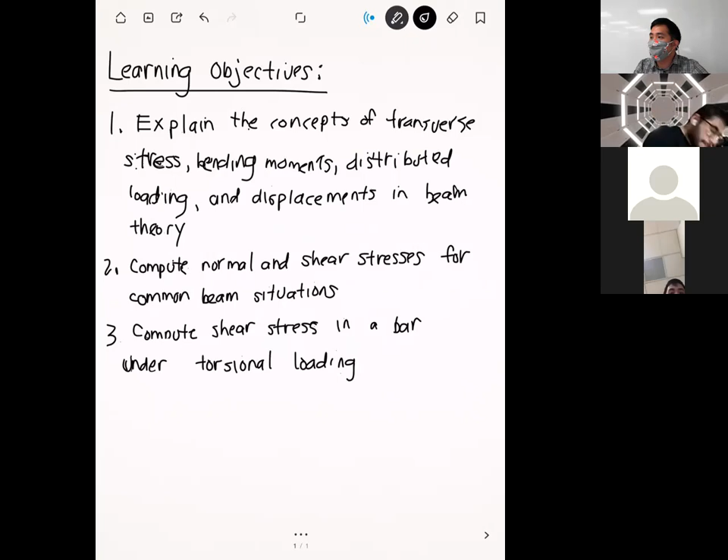Even at night, no wind? Yeah, not much wind at night. The past couple times I've been to Joshua Tree, I could be confusing it with Calico Ghost Town, but there was always some kind of wind. Not much this time, just a little bit of a breeze.

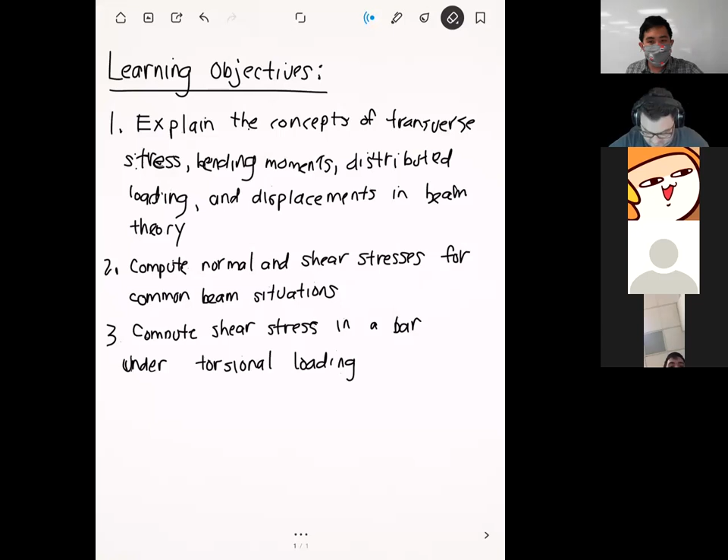How was your long weekend? Busy, busy doing homework and working on senior design stuff.

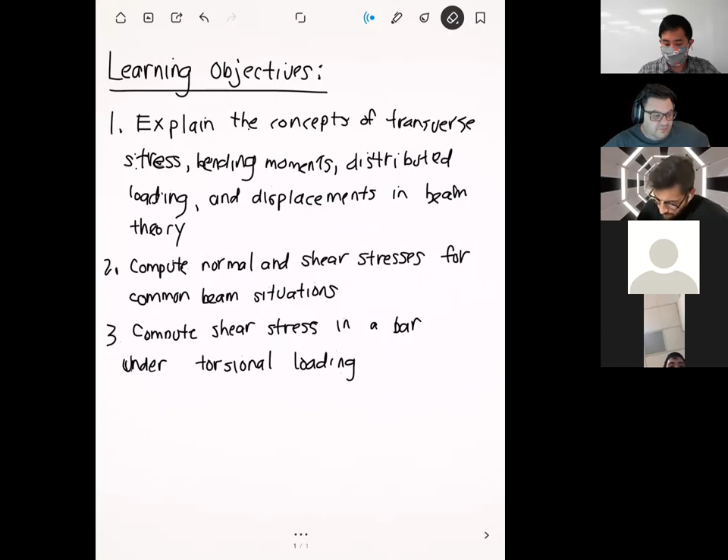Those are SolidWorks files, and we're going to use that on Thursday. The crank assembly is the one we'll use mostly in class, and the other CAD file is for an additional activity for the homework. But we'll do that on Thursday. Today we're doing one more lecture, since I like to keep the activities toward the last thing of the week.

Works for me. I just wanted to make sure if I needed to have Workbench open, I had ANSYS open.

Not today, we're going to do it on Thursday. All good.

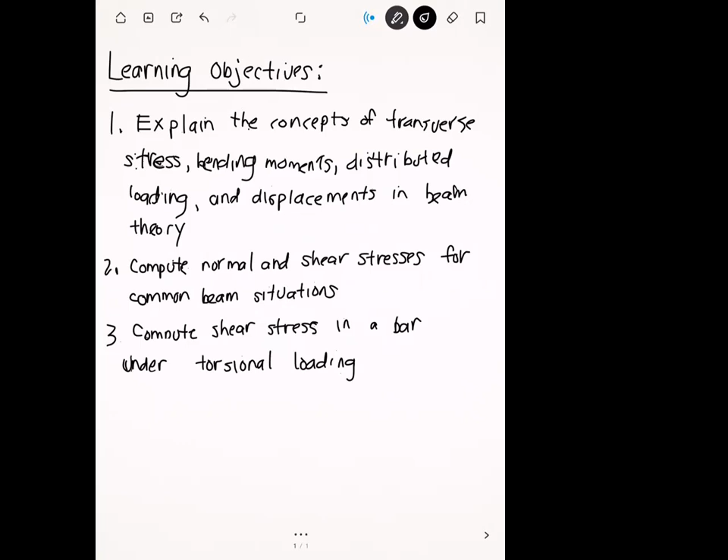Are there any questions on anything before we get started today? All right, let's go ahead and jump right in. The topic for today's lecture is going to be a review of beam theory.

I say review, but I don't think I ever really formally learned beam theory myself when I was in college, but my statics and strength of materials professors were a little bit sus, so maybe I was supposed to learn it and we just never got to it. I also never learned about drag and lift in my fluids class either, but I know for sure my fluids teacher was kind of on the way out.

My old fluids teacher back in college would take the first five minutes of lecture just to walk down the stairs to get to the front of the class, which was annoying at first. But later I found out he was actually in an airplane accident and survived it, and his leg had been permanently crippled since then, so I cut him a little bit of slack for that.

Okay, so beam theory, right? Beam theory in general is really useful to learn, not really for all the equations, because there's a lot of equations that come into it, but I like to think of it as a way to build intuition and a conceptual feel for how beam-like structures will respond to stress.

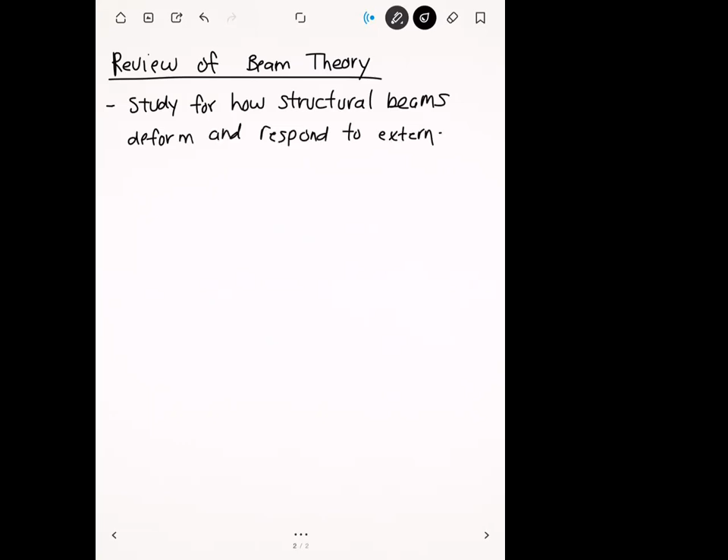Beam theory is the study of how structural beams deform and respond to external loading. Very much within the themes of this class, where in general we're interested in seeing how structures deform and respond to loading, but beam theory is specific to beams.

Let me draw you out what my version of a beam looks like. Very simply, a beam can just be any kind of long, slender structure. Here I have a cantilever beam, so on one end it's completely fixed, and the other end is free. Let me go ahead and draw the coordinate axis here. So we have our x-axis, which points down the length of the beam. And the y-axis points downward.

Some terminology here: the x direction, we call this the axial direction. That just refers to going down the length of the beam. And the y direction, this is the transverse direction, meaning that it's perpendicular to the long axis of the beam.

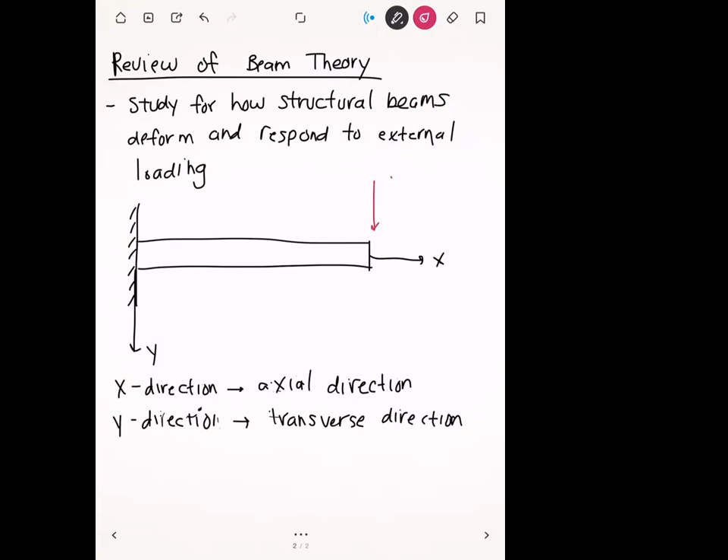All right, so on this beam, we can expose it to some external loads. And so we might have, let's say, a point load P. So we'll study a case like that.

Or another way we can load the beam is with a distributed loading. So we can have a load that distributes kind of evenly across the beam, maybe something like this. That might be some kind of pressure load or a line load that we put on top. And then in response to this loading, the beam's going to deform.

Let's say the beam deformed exaggeratedly, kind of like that. So it kind of dips down. And what beam theory will allow us to do, right?

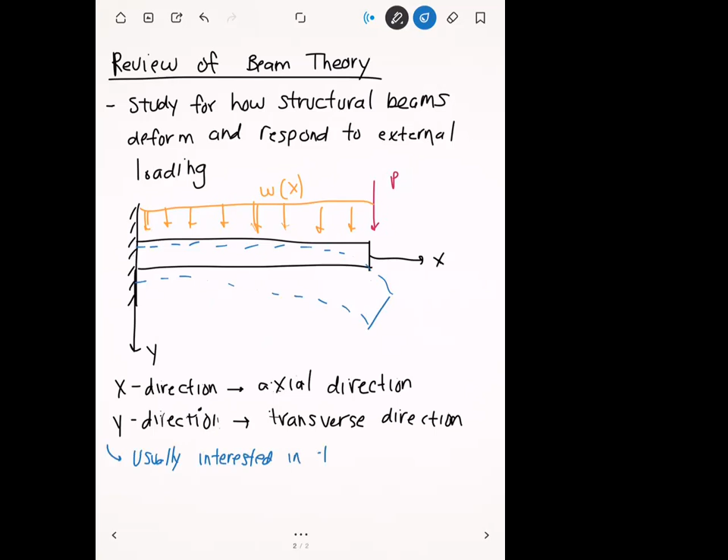Beam theory is basically a collection of differential equations that governs the displacement and the stresses in the beam. We can solve those equations for the transverse displacement, or the bending stresses in the beam.

So those are the quantities that we're going to be mostly interested in when working with beam theory. Any questions on this so far? All right.

So if we cut open the beam, let me draw two cross sections here. If we cut open a beam that's under loading, we'll primarily see two main loads that the beam is going to be supporting. No matter how you're loading it on the outside, each cross section of the beam usually is going to have some kind of transverse shear.

And the way that we denote transverse shear is we give it this direction here. Remember, shear stresses are parallel to the face on which they act.

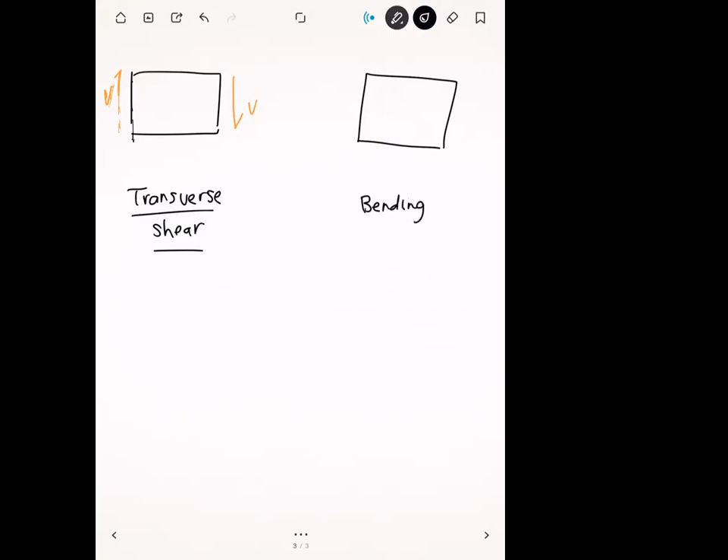And then the other quantity that's present in a beam usually is some kind of bending moment. A bending moment is given by a moment M, which we'll denote just like that.

And these forces, or these reactions that I'm describing here, are internal forces or internal stresses that occur within the beam. Remember, we talked about last Thursday that structures always, in order to maintain static equilibrium at every point within its structure, have to develop these internal forces or internal moments in order to balance those stresses.

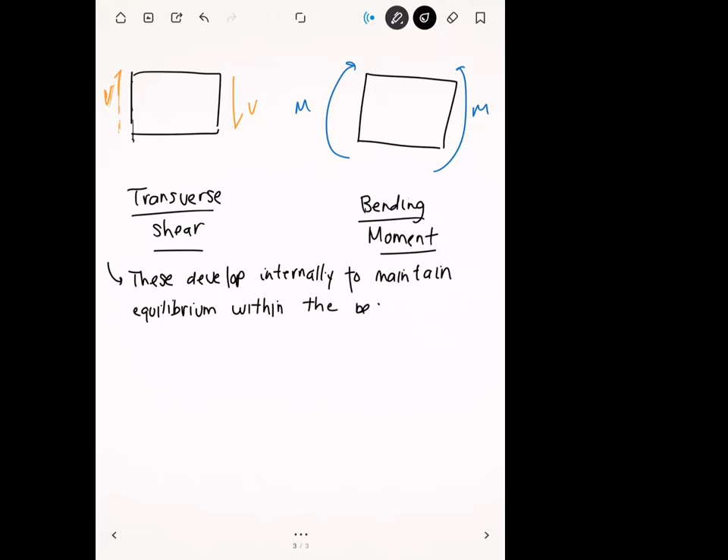All right, so let's go ahead and write out the equations for the beam. We're not going to be solving these equations here, but these are just to show you what equations govern these beams. These are basically a simplification of the general elasticity equations that we normally use for structures, but they've been specialized specifically for beams. Believe it or not, when you see these, these are actually a lot simpler than the more general equations.

All right, so there's a lot of variables here, so first let me define what they are. A lot of these are going to be functions of x, so they vary along the axial direction of the beam.

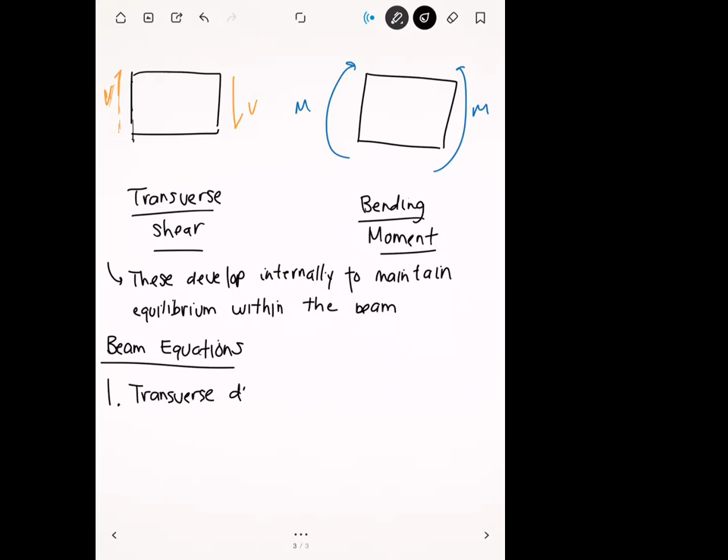First, let's define the transverse displacement. The transverse displacement is nothing more than the transverse deflection of the beam - how much the beam is going to deform in the y direction. We give that the symbol y of x.

Next, we have the transverse shear - actually, we've defined it up there. The transverse shear is just the internal shear stresses that develop within the beam. This is also going to be a function of x, so it can change along the length of the beam depending on what the loading situation looks like.

Next, we have the bending moment, which is also a function of x, so we have m of x. And then the last variable that we'll have that can vary with x is some kind of distributed loading.

We'll give this the symbol q of x. A distributed loading is some kind of external load that's distributed along the top of the beam. This doesn't account for point loads, which we usually handle through a boundary condition. But if you have a distributed loading present throughout the entire beam, we have to work that into the equations just like this.

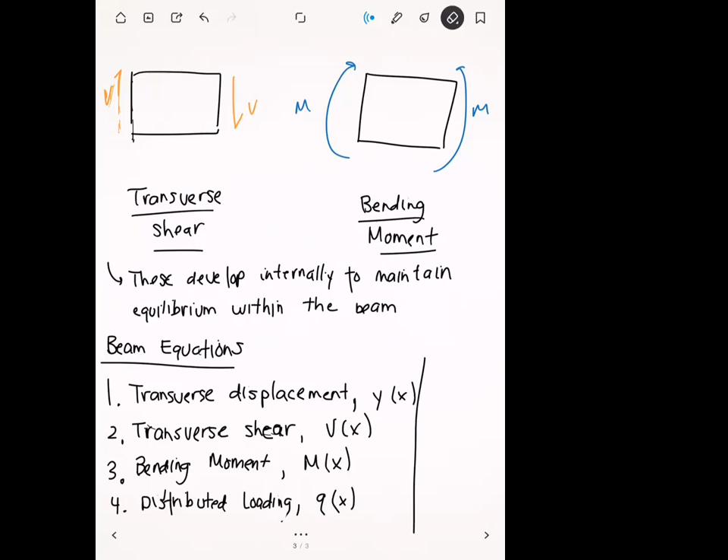There are a couple other quantities of interest that we'll see. I wanted to fit it on this page, but it's a little tight here. So another parameter we have to keep in mind for beams is the Young's modulus.

You'll see these show up in the equations, and this will have the symbol E, just like we normally give it. We talked about the Young's modulus before, so I won't go into that again.

The last parameter we'll look at is the moment of inertia, which is given the symbol I. The moment of inertia is a property that depends on the shape of the cross section.

Depending on what type of cross-sectional shape your beam has, whether it's an I-beam, a cylindrical beam, or a square beam, all of those have different moments of inertia, and that's going to affect the displacement of the beam, and really all the quantities, purely from a geometric factor.

Different shapes distribute the mass of the beam in different ways, and that has an impact on the results. All of those different shape effects are basically summed up in the moment of inertia.

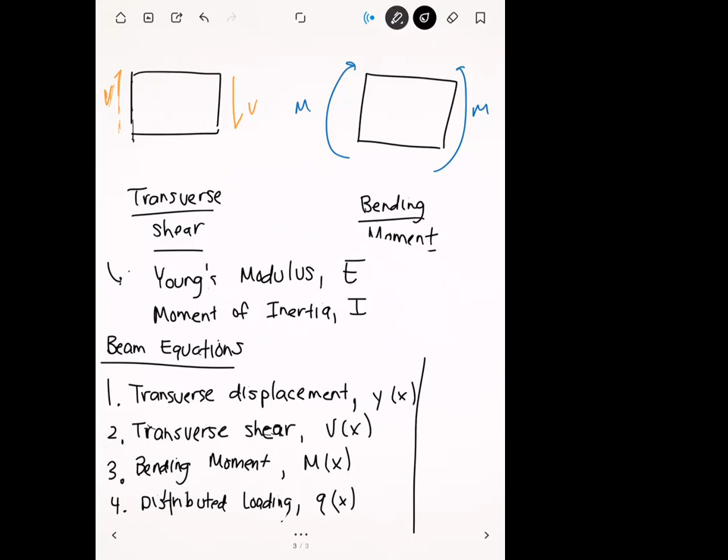Any questions on this before we jump into the equations? All right, so let's list out the equations—there's quite a lot here, and they're kind of grouped into different categories. First, let's go over the bending moment shear load equations.

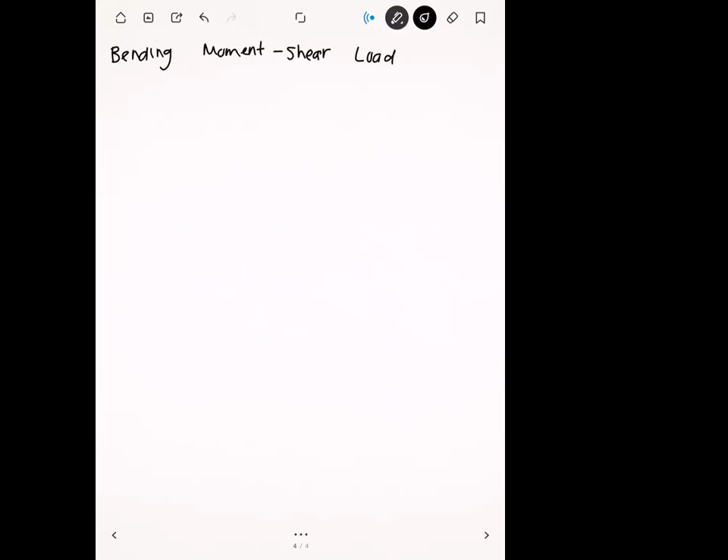The bending moment shear load equations look like this: we take the derivative of the bending moment as a function of x, and this is going to be equal to the transverse shear stress as a function of x.

Then we have the second derivative of the bending moment as a function of x. This can be equal to minus q of x—it's going to be minus the distributed load.

So for a case where you have a distributed loading, this is a way that you can solve for the bending moment and also for the transverse shear.

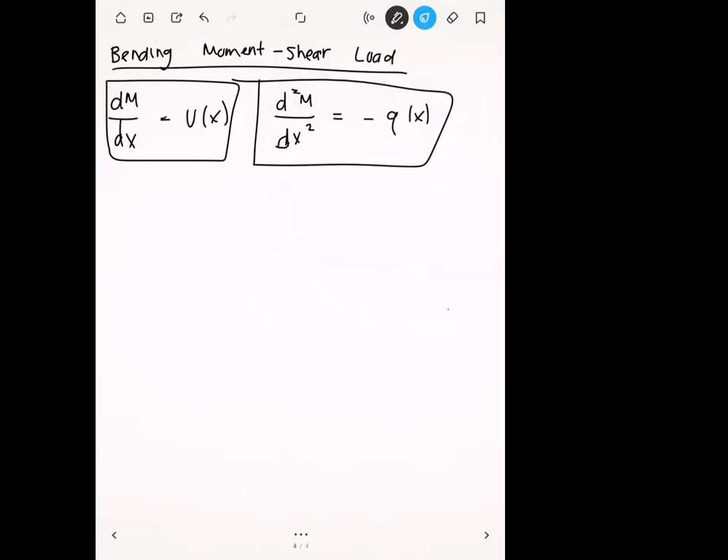Usually the way these equations are used is that you are given q of x—the external load—and that's not too different from our finite element cases.

Then you use the equations to solve for the internal reactions: the internal bending moments and the internal transverse shear.

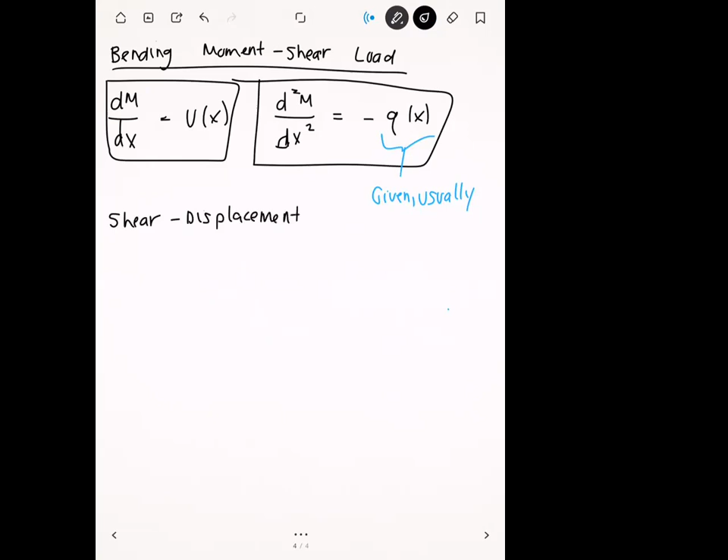Once you have the transverse shear, you can relate that to the transverse displacement of the beam.

Basically, what you're going to do is take these equations here. Once you solve for v of x, you plug it in down here, and you can use this to solve for y.

The equation for that is v of x equals minus EI times the triple derivative of y with respect to x cubed. This will give you y once you solve these differential equations.

So that kind of forms one closed system right there. But what if you wanted to relate the bending moment and the displacement?

These equations are called the bending moment displacement equations—or there's only one equation, actually.

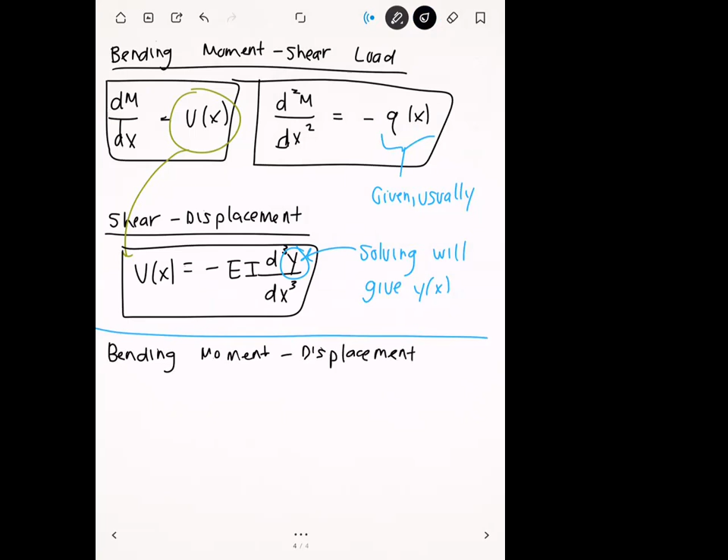To relate the bending moment and the displacement, we have a second derivative here: M is equal to minus EI times the second derivative of y with respect to x.

So if you wanted a relationship between M and y, that's your equation.

Right, and then finally, if you wanted to relate the distributed loading with the transverse displacement, you can do so with these equations. We can have q of x is equal to EI times the fourth derivative of the displacement.

So for the case where you're given the distributed loading q of x and you're only interested in the displacement, you can solve this differential equation here. Although it's a fourth order one, so you're going to need a lot of boundary conditions for that.

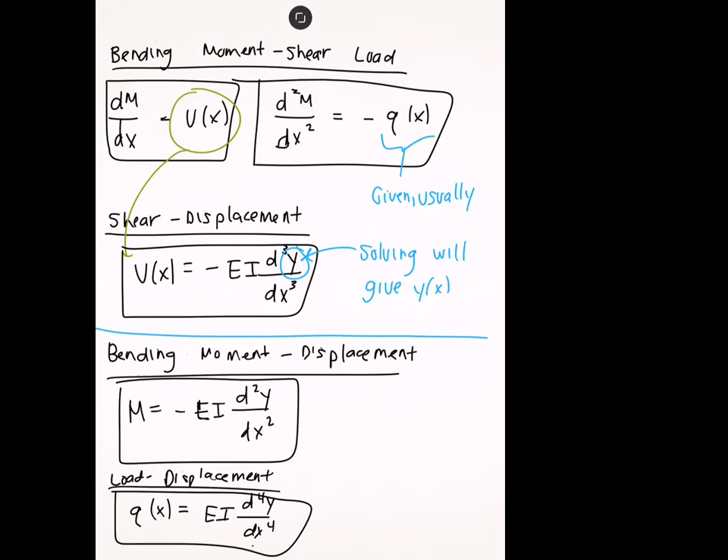Okay, so any questions on this so far? Is that dM over dx equals v of x or minus v of x? It's just a positive v of x. And that's an equal sign? Yes.

All right, and so those are all the equations there. Let's talk about a way to compute the bending moment, or the bending stress.

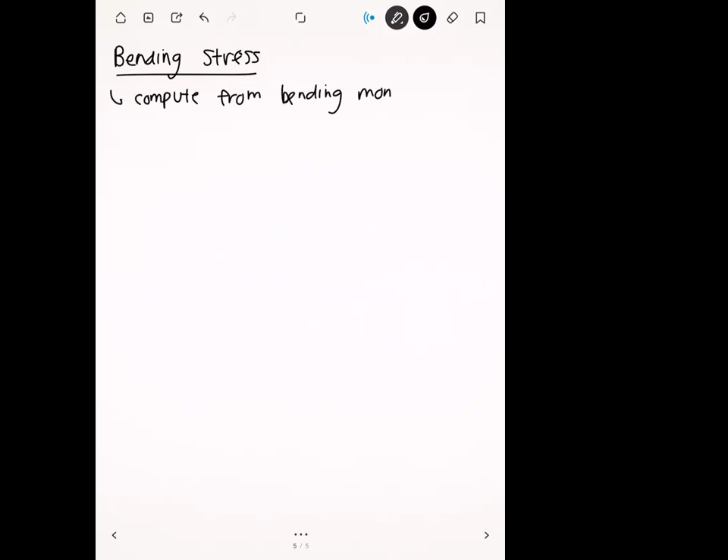And so the bending stress, you can compute this from the bending moment. Basically what this stress is, it's a normal stress that the beam experiences as a result of the internal bending moment.

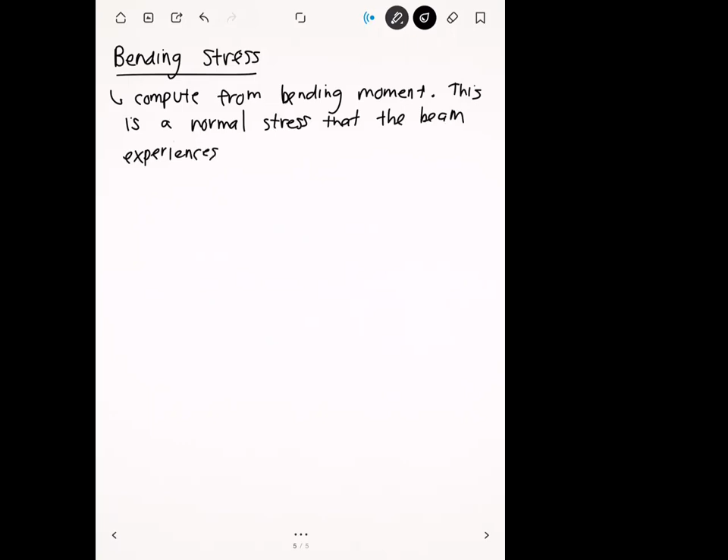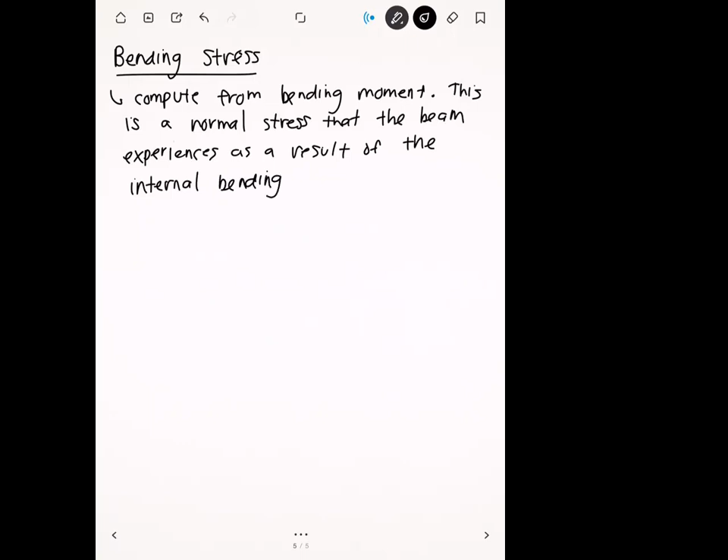And so the equation for it is very simple. It's going to be M, which remember is a function of x, times d sub y, and I'll define that in a second, divided by I. This d sub y here is going to be our distance from the center line of the beam.

Right, and so if we draw a beam cross section just like this, we kind of draw the beam center line just like that. dy is simply going to be any distance that's up from here. So basically what this equation is telling us is that across the cross section of the beam, if we go vertically or transversely up and down, then the bending stress is going to vary.

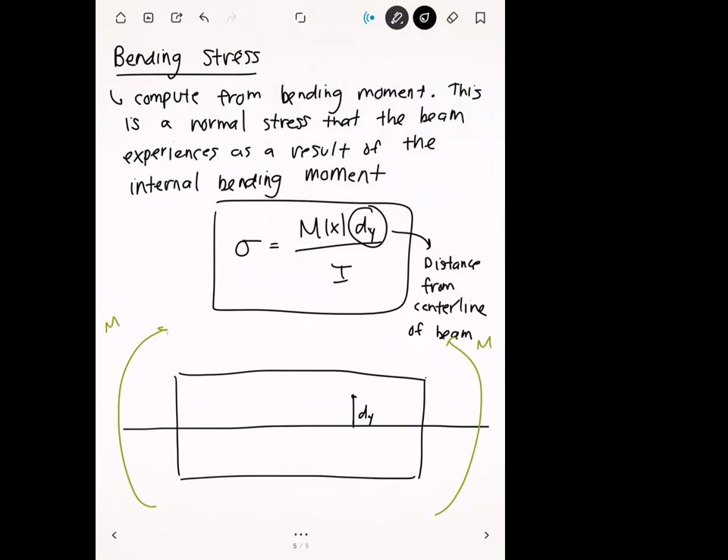And in fact, if we say that the bending moments are something like that, and those are needed to maintain equilibrium, what that tells us is that if you can imagine you take a rectangular block and try to squeeze it up like this, kind of like what the bending moments are doing, you can imagine that the top of this beam is going to be compressed because you're bending it that way, and the bottom of the beam is going to be in tension.

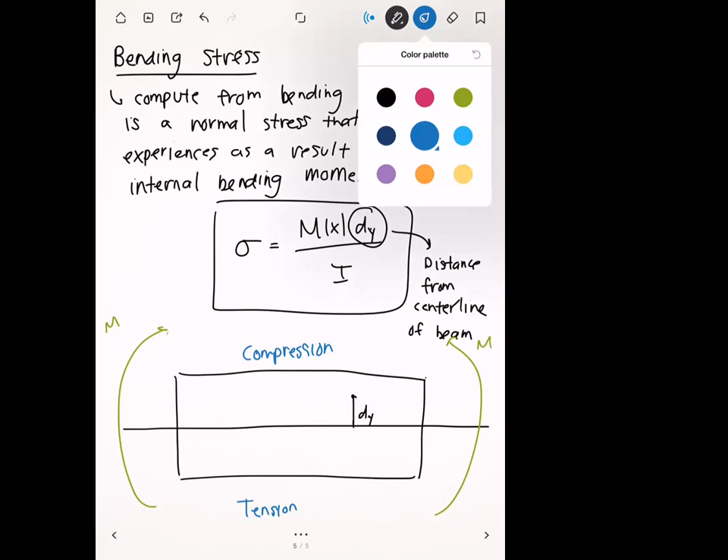Actually, I think Charlie asked a question about this last week too, about what the stress distribution would look like in the beam. It would kind of look something like this - if we use the middle of the beam as a zero point, the bending stress distribution might look something like this. Then we can draw the same thing on this side here.

So the top and bottom would have the same value for the stress? Top and bottom have the same value, but opposite sign, because one would be in tension and the other one would be in compression.

And so actually this dy here, you can think of it as a coordinate. Above the midline here, dy is positive, and below the beam midline, dy is going to be negative. So the bending stress is going to change sign once you cross the midline. And if you notice from this equation here, when we're at the midpoint of the beam, the bending stress is actually zero.

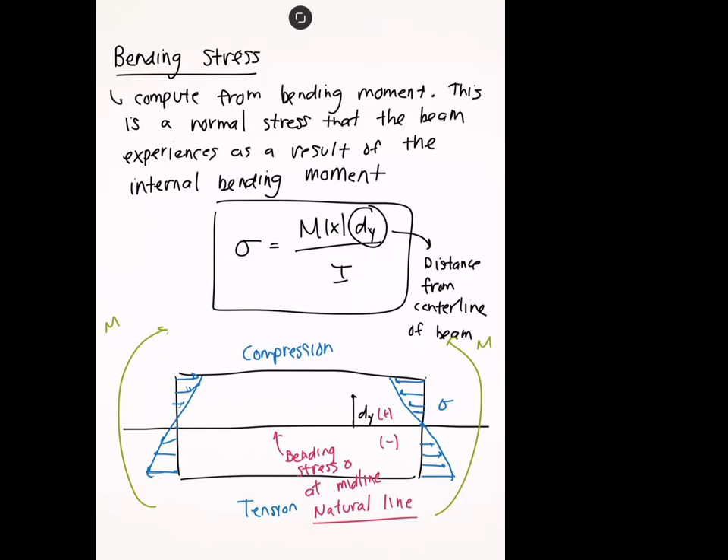And then there's also the natural line, which just means that there's zero stress here. So for a straight beam like this, the midline and the natural line are coinciding - those are basically the exact same thing.

But later on, we'll look at cases where we have curved beams, where the natural line is actually going to move away from the midline of the beam. But for straight beams like this, you can consider them to be exactly the same, because the geometric midpoint is also exactly where we have zero bending stress in the beam.

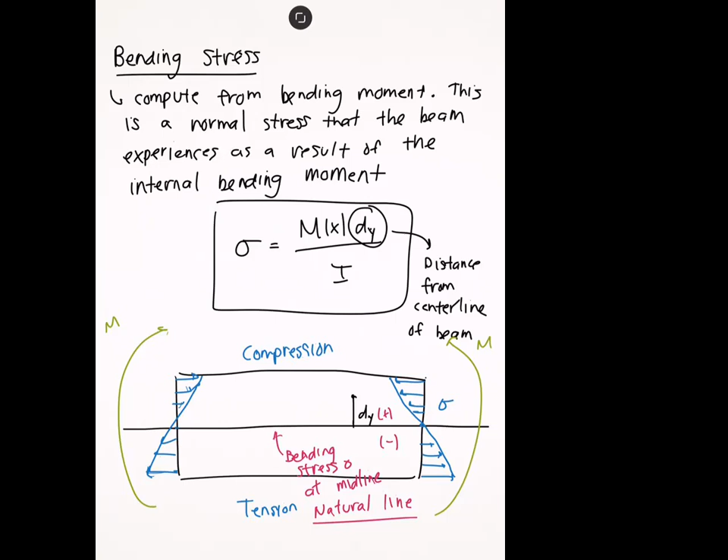So that's kind of classical beam theory. For classical beam theory, you have your shear, you have your bending moments, and you have your bending stresses. Now let's look at a couple more specialized cases, where the solution will change slightly.

So first, let's consider thick beams. By thick beams, I mean beams that have a larger cross section than usual. Specifically, they're larger than normal in the transverse direction.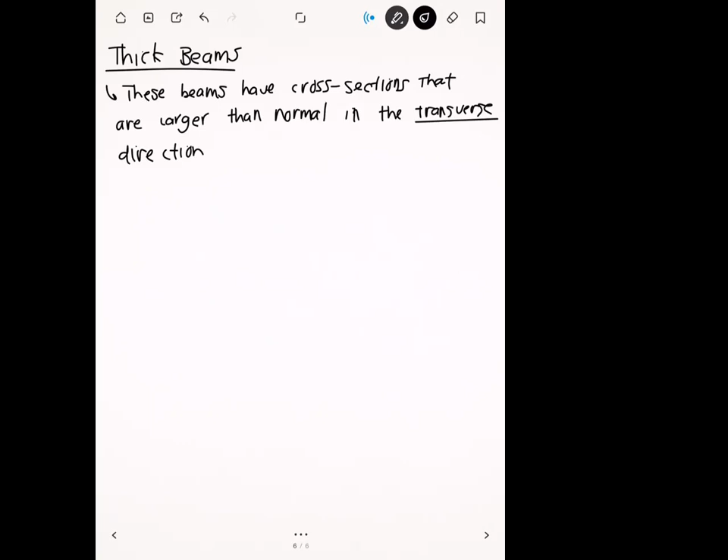So basically, you're going to have beams that vary away from the midline a lot more than normal. And in these situations, you're going to have pretty significant bending stresses that develop.

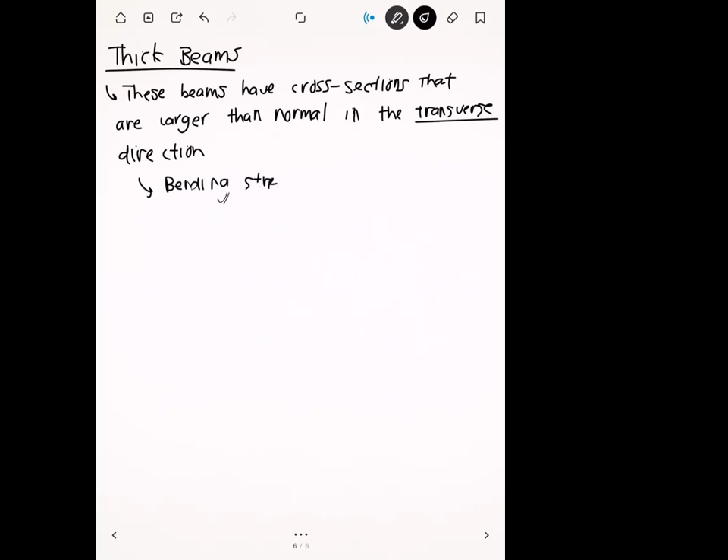And the reason for this is that we can potentially have very high values of dy. And so in these cases where we have a lot of bending stresses, the beam itself needs to develop some more internal stresses in order to maintain equilibrium.

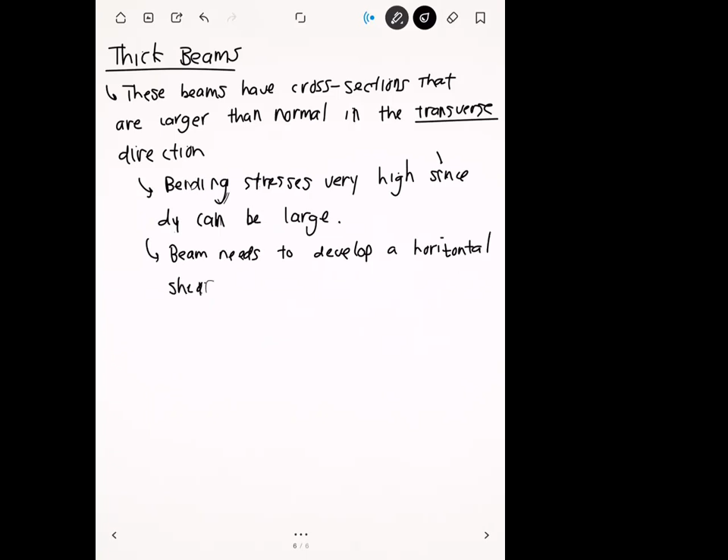And in particular, the stress that comes out of thick beams like this is going to be a horizontal shear stress.

Schematically, let's draw what we have here. Let's say that we have a beam cross section and we have our internal bending moments that look like that.

If we take a horizontal slice of the beam, not at the midline because we know the midline has zero stress, but a slice down there - in addition to the bending stresses that are present, you're going to have a pretty significant horizontal shear. This tau that I drew here, you'll notice that's going in the horizontal direction, right? So it's not transverse, it's axial - this is a horizontal shear stress.

You can work this into the beam equations - we're not going to do that, but I can give you the solution for this on the next page. This horizontal shear is going to vary as a function of dy, so it's going to be different at different parts of the beam. That's something you need to account for when you have thick beams like this.

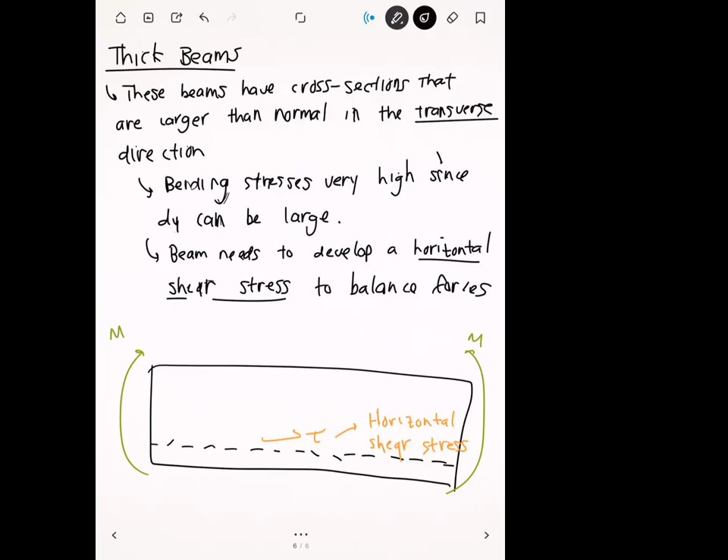The equation for this is given by the following: if we say tau of dy, this is a function of the transverse distance. This is equal to V, remember V is the transverse shear, divided by I, times h squared divided by 8 minus dy squared divided by 2.

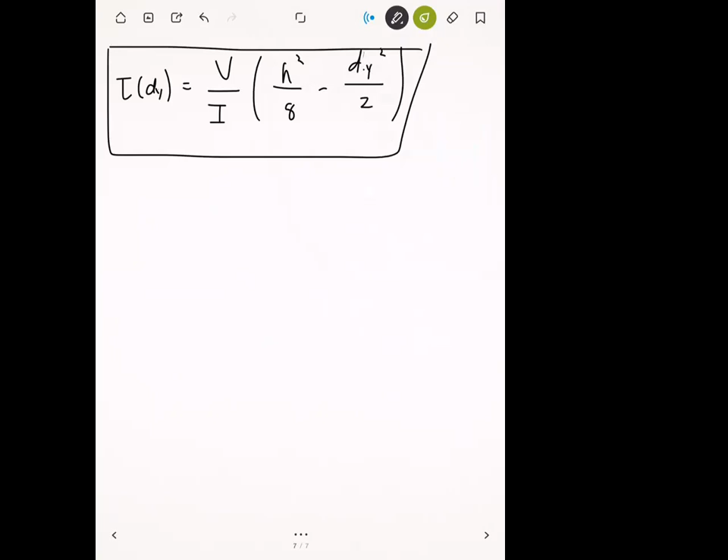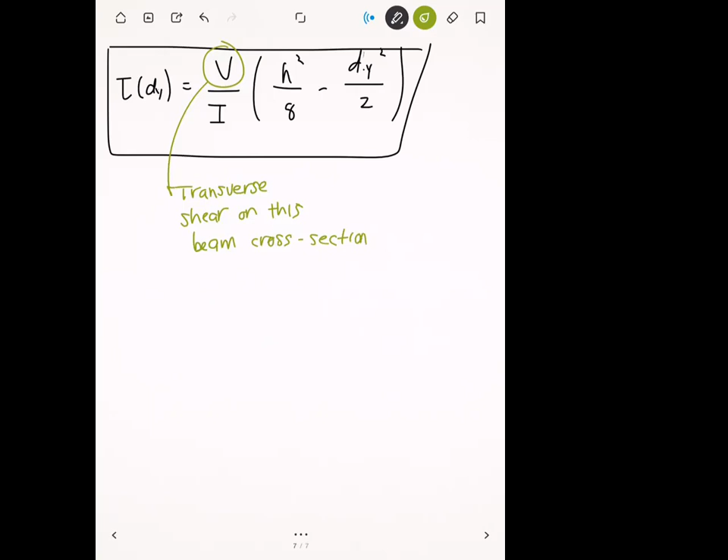So you can see from this equation here that this shear depends on V - remember V here is the transverse shear on the beam cross section. It also depends on I, where I, remember, is our moment of inertia. And this h, I don't know if we've defined this yet, but h here is the height of the beam.

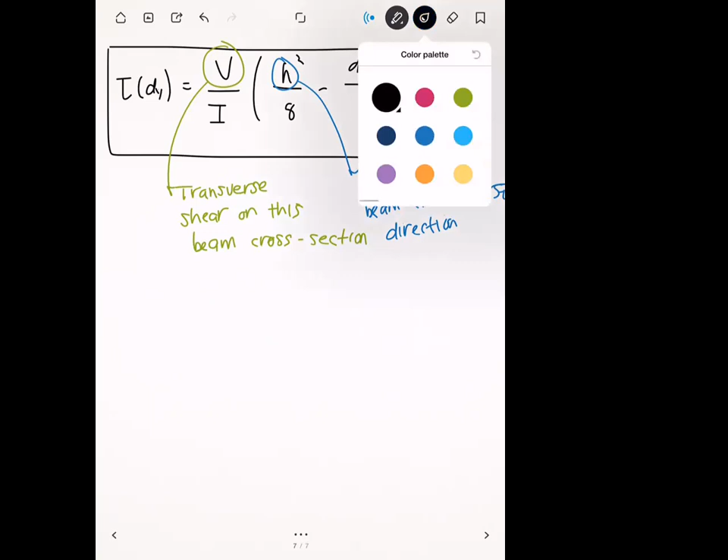Another way you can think of H is as the maximum value for dy. So for any given cross-section, dy has a maximum of H that it can maintain. Any questions on this equation here?

Okay, so those are thick beams. For thick beams, you need to take this horizontal shear into account.

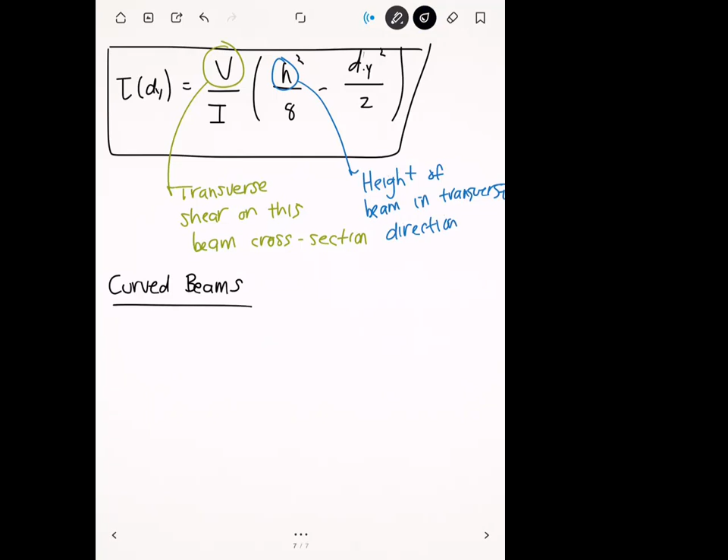Now let's talk about curved beams. Curved beams are beam structures where the cross section is bending like this, so your beam might look like this. Very common in practice. If you're making any kind of structure that requires curvature, you're going to have some curved beams. I know for those of you on Baja, a lot of the structure of your vehicle has a lot of curved beams like this.

And if you read the notes, these notes are written for a biomechanics class, and if you consider your rib bone as a curved beam, then this theory would also apply here.

We're only going to talk about the modifications that you would make in general. Because the beam is curved like this, the midpoint of the beam and the natural line deviate from each other. One way we can sum that up is that the bending stress at the midpoint of a curved beam is no longer zero.

What's happening is that the natural line, or the line of zero stress, is actually moving towards the inner curve of the beam.

If we want to draw this, first let's draw the midline. The midline is still exactly the same as before, so it's going to be at the exact midpoint of the beam. But the natural line, or the line where there's zero bending stress, that's going to move slightly down. This green line right here is the natural line.

This actually breaks some of the assumptions that we had in our previous equations, so our equations for things like bending stress are going to vary here. I'll give you those equations on the next page, but I need to redraw this figure because there's a lot of distances that we need to know. Before I do that, are there any questions on this?

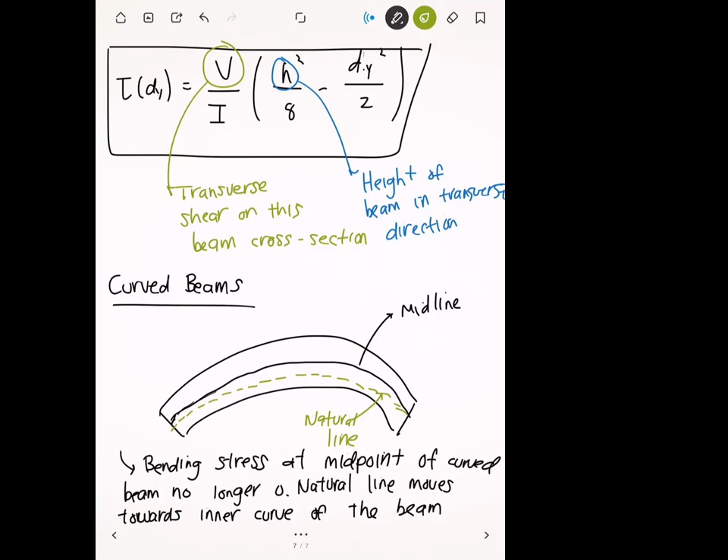All right, so let me go ahead and redraw the figure for you, just so that we can have all these distances. It's a little bit of a neater picture here. Let me go ahead and draw the midline here in red, and then the natural line I'll draw in green.

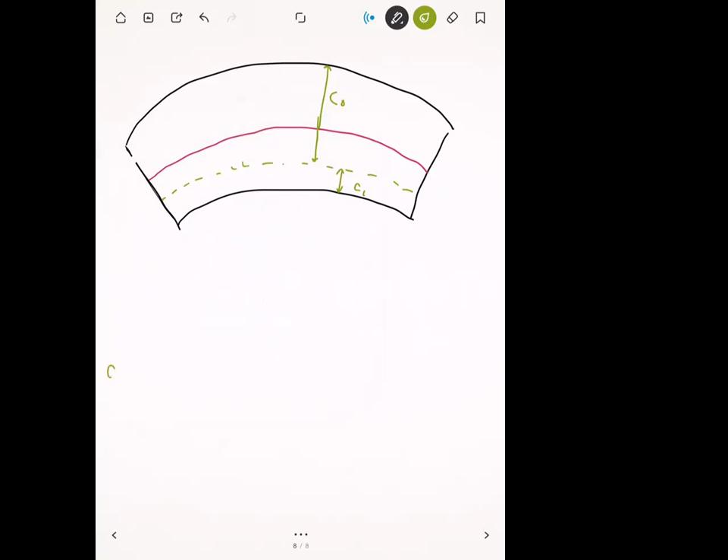All right, so let's draw some distances on this thing. First let's consider distances with the natural line. The natural line is moving down, so now the amount of beam above the natural line and the amount of beam below the natural line are different. We can characterize that with these two distances: the distance from the outer curve of the beam to the natural line, we'll call that C0, and the distance from the natural line to the inner curve of the beam, we'll call that C1. So C0 and C1 are distances between the natural line and the top and bottom of the beam.

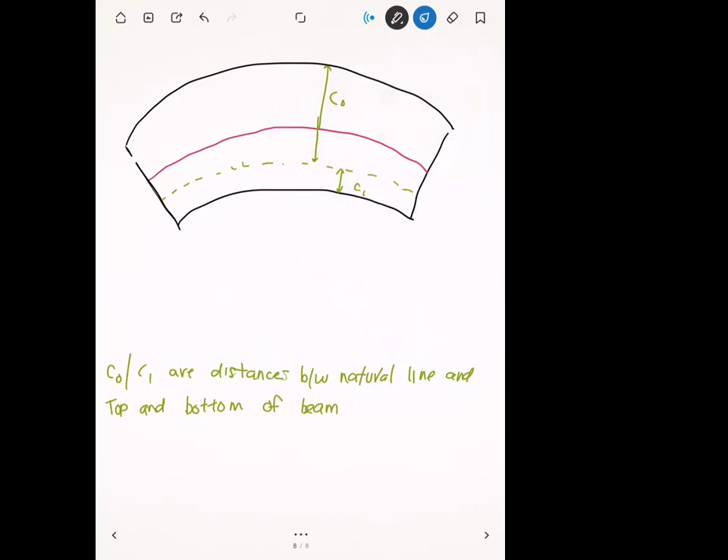Next, we have the distance between the midline and the natural line — I'm talking about this distance right here. This is directly a measure of how much the natural line shifts down from the midline. We'll call this distance epsilon. So epsilon is the distance between the natural line and the midline.

Lastly, what we need are the actual radii of curvature for the outer surface and the inner surface. If we draw a center here, we'll call this O. This radius of curvature of the outer part of the beam we'll call RO, and this radius of curvature here we'll call RI. So RO and RI are the radii of curvature of the inner and outer surface of the beam.

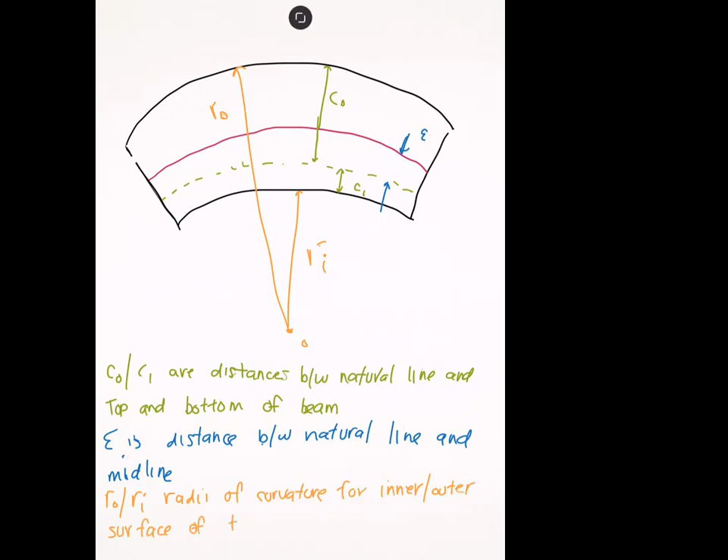Okay, all right, and so with all those defined, we're ready to compute the bending stresses on the inner and outer curves of the beam.

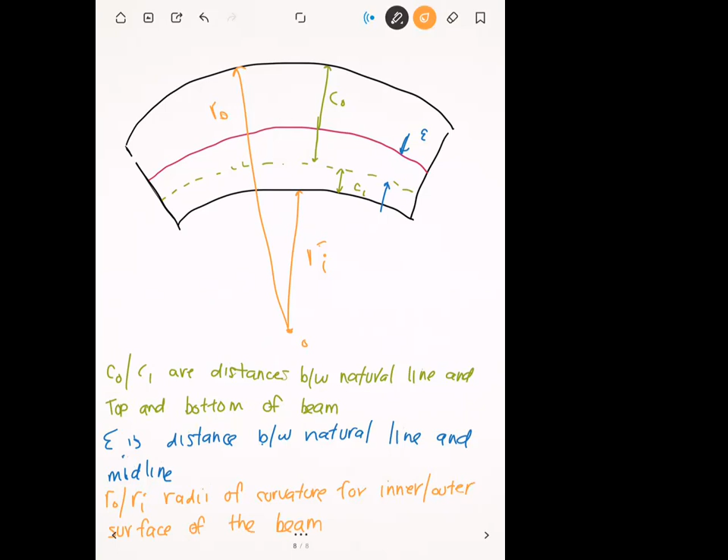Okay, so any questions on the variable definitions here? All right, and so with those, we can compute the normal stresses, the normal bending stresses on the inner and outer curves.

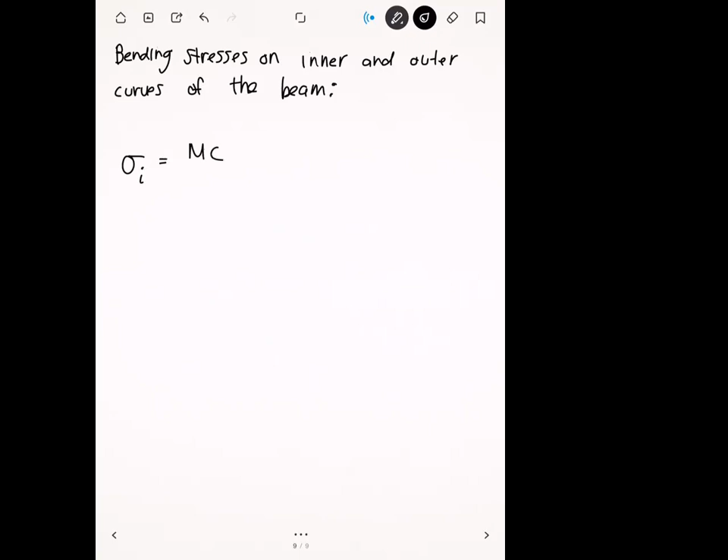Okay, so let's start with the inner one. Sigma I is going to be M times Ci divided by epsilon A Ri or RI. Okay, for this A right here, this is the cross-sectional area of the beam.

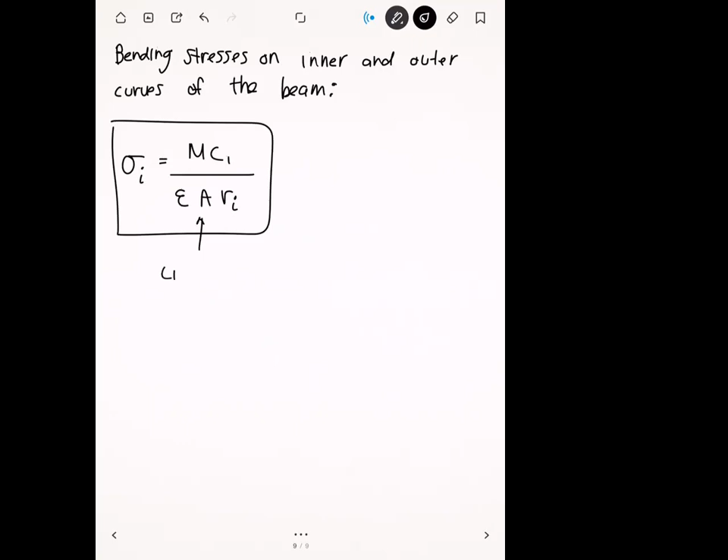And then we have sigma O. This is the bending stress on the outer surface of the beam. This is going to be minus M CO divided by epsilon A RO.

And so you can see here that the main difference between these guys, these equations look very similar, but the only difference is that one equation has Ci and Ri, the other equation has CO and RO, okay? And the sign is flipped.

And so basically, we modify these equations, or the modification that we're making is mostly due to two things. It's due to how much the neutral line moves down, okay? And it's also due to the actual radii of curvature of the beam itself. And so those are the two main factors that modify our bending stress calculations for curved beams.

Okay, any questions on this? Okay, so I know there's a lot of equations today, and I'm kind of highlighting them to you guys from a perspective of, you should know which factors affect which inside these equations, right?

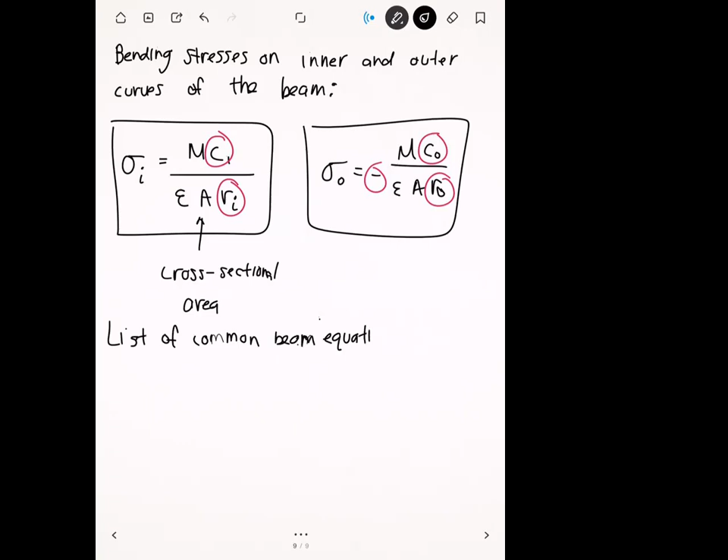And so a table like this is really useful, not because it's going to cover every single situation out there, that's impossible. But again, a lot of situations you can kind of approximate to something like this, and then that's going to give you a good idea of what to expect from the solution.

Okay, all right, and so the first common beam scenario I want to go over is a simple cantilever beam with a load that's concentrated at the end, okay.

Okay, and so visually it looks like this. You have a beam that's fixed to a wall, and that's the definition of a cantilever beam. And then the other side is completely free. And then at the tail end, what you have is a concentrated load P, okay.

The length of the beam is given by L, okay. And then just for clarity in how I'm expressing these solutions, I'm going to call the left side of the beam A, okay, and that'll be side A. Actually, let me give it in lowercase just so that we don't get confused with cross-sectional area A. And the right side of the beam will be B.

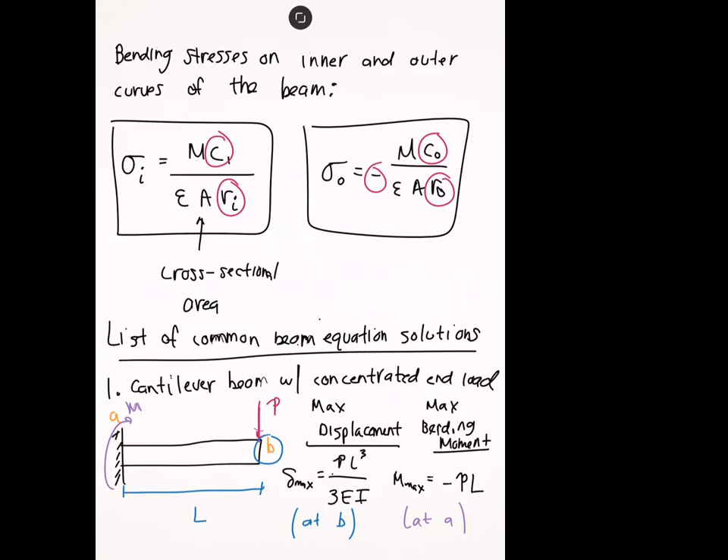Question from the chat: will these beam equations appear on the exam? I'm not going to ask you to write out the equations or use them to compute anything. Again, these are used for intuition. One way this might appear on the exam is that I might just give you this figure and ask you to tell me where you think the maximum displacement is going to occur, and where you think the maximum bending moment is going to occur. That's the kind of qualitative, intuitive, conceptual knowledge I want you guys to take away from this. The formulas themselves are not that important for this class, but what's more important is getting this intuition of how these kinds of slender structures are going to respond to external loads.

Question: is the P for pressure or for load? In this case, this P here is for a load, and P has units of force. It's a concentrated load.

So that's the cantilever beam with a concentrated end load. Are there any other questions on this before we move on? Okay, so that's the first one.

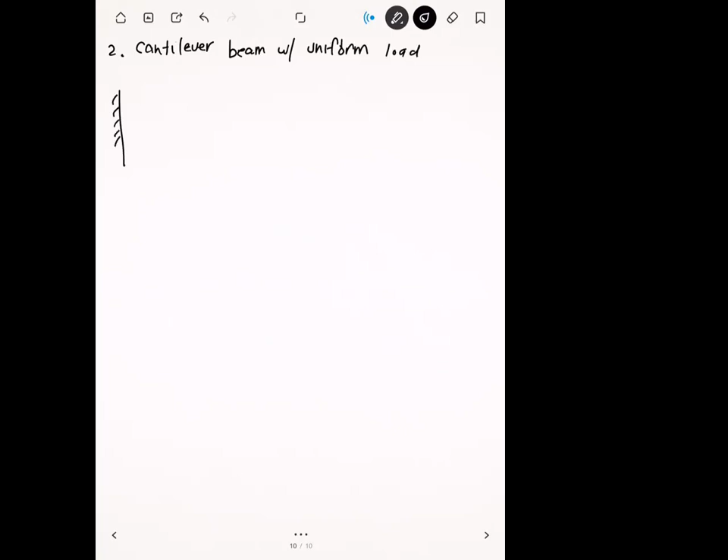Now let's go to the next one, which is a cantilever beam with a uniform load. Geometrically it looks similar to our last case, but this time the load is going to be distributed across the entire beam. We'll draw them in red to be consistent from before. So now our load is not concentrated at the end, but is distributed throughout the entire beam. We'll give this the symbol Q naught.

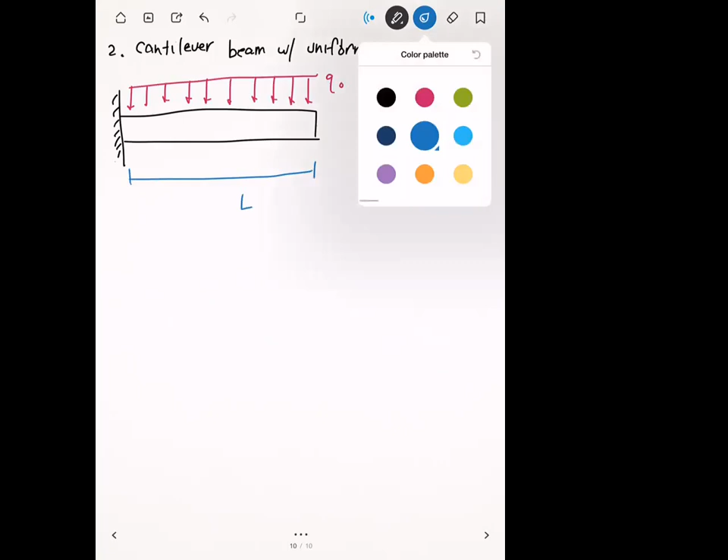This beam is going to have a length L. The left side of the beam will be A and the right side of the beam will be B.

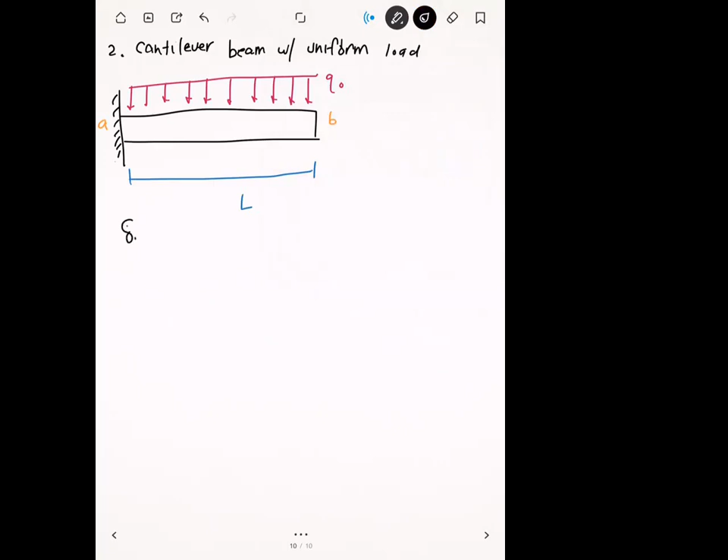Just like before on the previous page, we can compute the maximum displacement. The maximum displacement of this beam is going to be Q naught L to the fourth divided by 8 EI. And then the maximum bending moment, this is going to be minus Q naught L squared divided by 2.

Now let's quickly mention where these are going to take place. Since the supports here are exactly the same, and we only have one fixed support on the left side, this tells us that the maximum displacement is probably going to be at the location furthest away from the support. So the max displacement here is going to occur at the right side of the beam, at B. And the maximum bending moment is going to be at A, because that's where it's supported, and that's where the biggest reaction force is going to take place.

All right, so those are the two main cantilever solutions. I'm going to skip ahead a little bit to give you guys a different look, and now let's consider a simply supported beam with a concentrated center load.

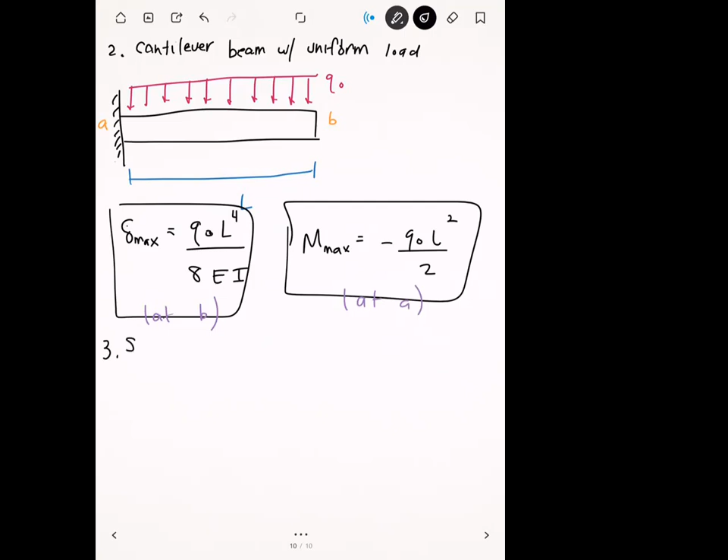A simply supported beam is supported on both sides, but instead of a fully fixed support like this, we have a pin and a roller. Visually it looks like this: on the left side that's our pin support, and on the right side we have a roller support. The biggest difference between the pin and roller versus the fixed support above is that pin and roller supports don't supply any kind of reaction moments, and that's going to affect our internal bending moments on the inside.

So let's go ahead and draw our concentrated load. Since both ends of the beam are now supported, both of those are going to have a zero transverse displacement. So in order to get something interesting, we have to apply the load at the middle of the beam.

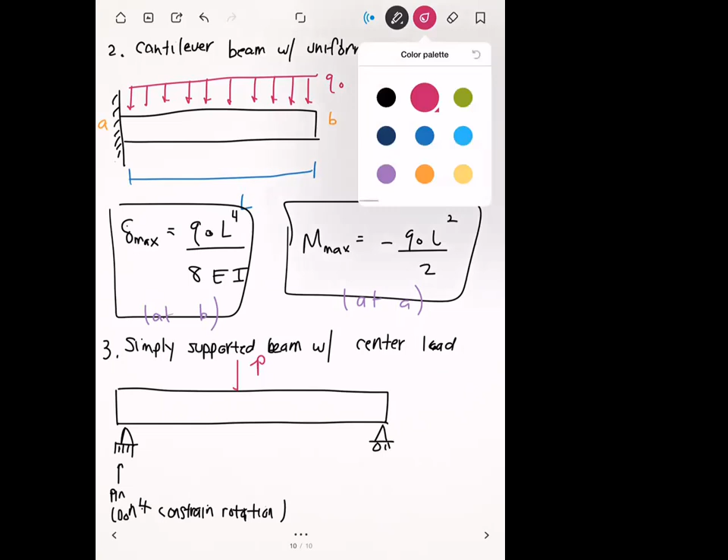Just like before, we have the length of the beam given by L. The left side of the beam we'll call A, and the right side we'll call B. So the equation for the maximum displacement is going to be P L to the fourth divided by 48 EI. That's how you compute how much the beam is going to displace.

Location-wise, this is going to occur at the part of the beam where the load is happening, which is also the part of the beam furthest away from the support. Since we're supported here on both sides, the part of the beam furthest away from them is going to be at the middle. So our maximum displacement here is going to be at the center of the beam, which is where the load is applied and which is furthest away from the supports.

Yep, that's L to the fourth, sorry.

Now let's do M max here. This is going to be P times L divided by 4. And once again, since both of the supports can't supply any kind of reaction moments, the moments at those locations are actually going to be zero, because there's zero reactions there. So the maximum bending moment here is actually also going to occur at the center of the beam.

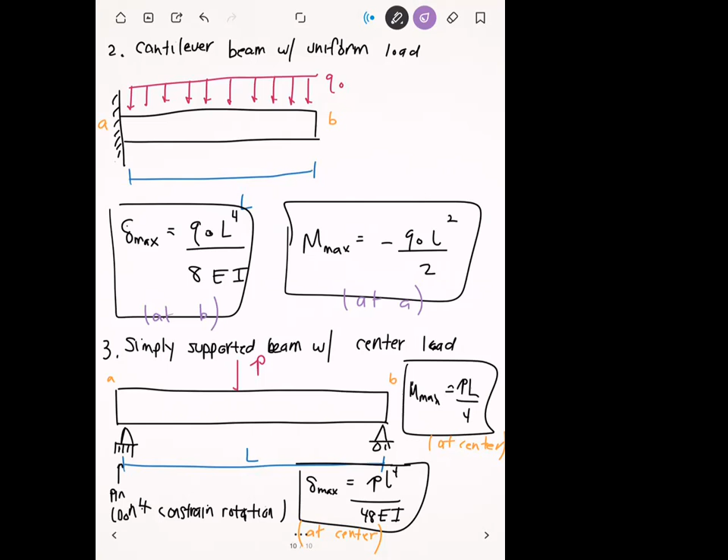So if I draw an exaggerated look at what the beam looks like after it's been displaced, it's going to look something like this, kind of this bowl shape. What's happening here is that because the middle of the beam is being depressed a lot, in order to maintain equilibrium there, the beam itself has to exert an internal bending moment to cancel out that high curvature in that location. And that's why in the case of a simply supported beam, both the maximum displacement and the maximum moment are going to occur at the same location.

Any questions on this?

Okay, so I have 4 more different beam solutions in the notes, but I think with just these 3 examples here, the point kind of gets across. The exact formulas and numerical values, I'm not that concerned about, and I'm not going to quiz you on that. But I want you guys to get this intuition of the relationship of where my supports are, where are my loads, where is my max displacement, where's my max stress going to be, okay? Because that knowledge is going to serve you really well.

Because when you're doing finite elements, next week we're going to start getting more into how do we fiddle around with the settings and what do certain settings do. What you'll discover over the next few weeks is that there's a lot of ways that your finite elements can get messed up. So it's really important to have a good conceptual understanding of the physics behind these situations, so that you can look at a finite element solution and be like, that doesn't look right. And if something doesn't look right, you can go back and see, maybe I need to fix my mesh, my boundary conditions. Because ANSYS is not going to tell you. ANSYS is just going to compute the solution as you say it, but it's not going to tell you whether it's right or wrong. So you guys need to determine that as the engineer.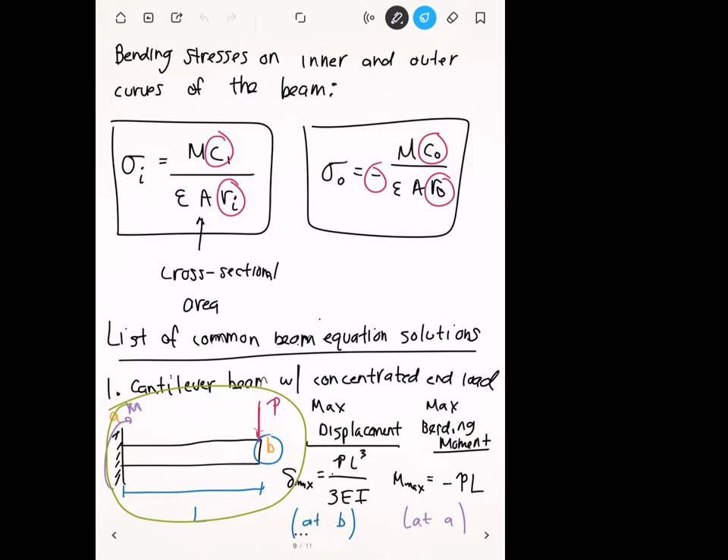All right, the last thing I wanted to cover today is a bit more of a niche situation. I'd say this is a lot more common in automotive engineering than anything. But we're going to talk about torsion and torque, okay?

Because when you take a bar, you take a rod and you put it under torsion, that's also going to develop some stresses on the interior of the structure.

And so visually, it looks something like this. Let's say that you have a cylindrical structure, and when I say torsion, what I mean is that if we consider this dotted line here to be the long axis of the rod, torsion is going to apply a load that's kind of like a twisting load. It's not a bending load, so we're not going to be bending this — we're literally going to be taking it and kind of twisting it with our hands. Actually, let me use red just to be consistent.

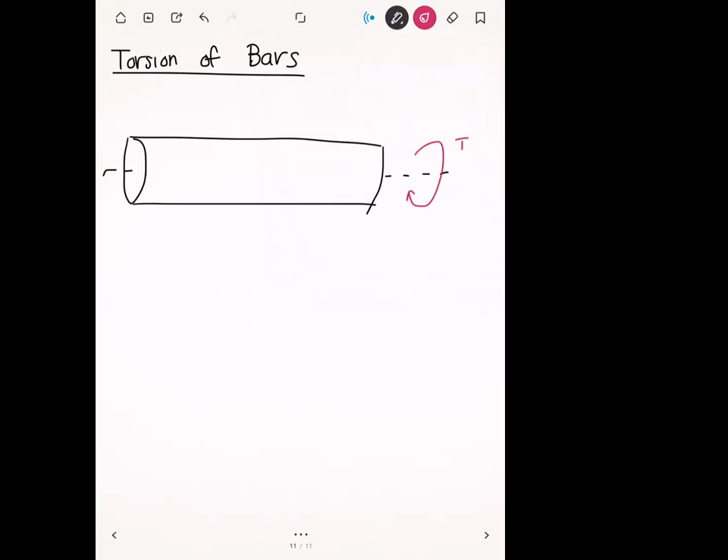Okay, so we're going to apply a bending torque, or a torsional torque T, and on the other side we have an opposite torque. This is a different kind of loading than what we've been looking at for beams, but it's still going to produce some stress. In particular, this torsional loading will produce predominantly a shear stress.

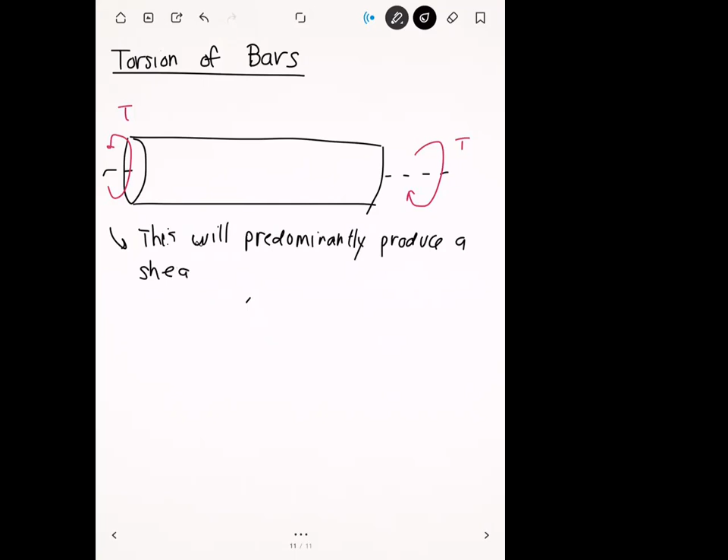And the formula for the shear stress is tau, which is equal to T, the amount of torsional loading that you apply, times R divided by J. So we have a couple new variables here.

R here is simply the radius. So for the simplest torsional case, you know the radius of your rod.

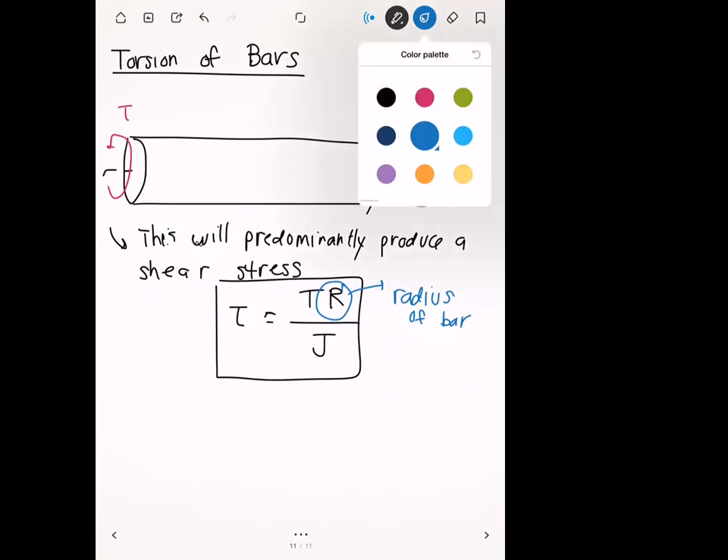This J right here serves a similar purpose as I for our beams. This J is called the polar moment of inertia of the bar. The way you compute J is different than how you compute I, but it serves kind of the same role. Based on the shape of your cross section—whether circular, oval, ellipsoid, star-shaped, or whatever—that shape is going to impact how stresses develop inside your structure, because the shape, just like moment of inertia, changes how mass or matter is distributed throughout your cross section. And that's really important because the way the mass is distributed has a big impact on how the internal structure develops internal stresses.

That's for a thick bar, and we can also find the same equation for a thin wall bar. So let's say you have a thin cylindrical shell, a hollow tube like this.

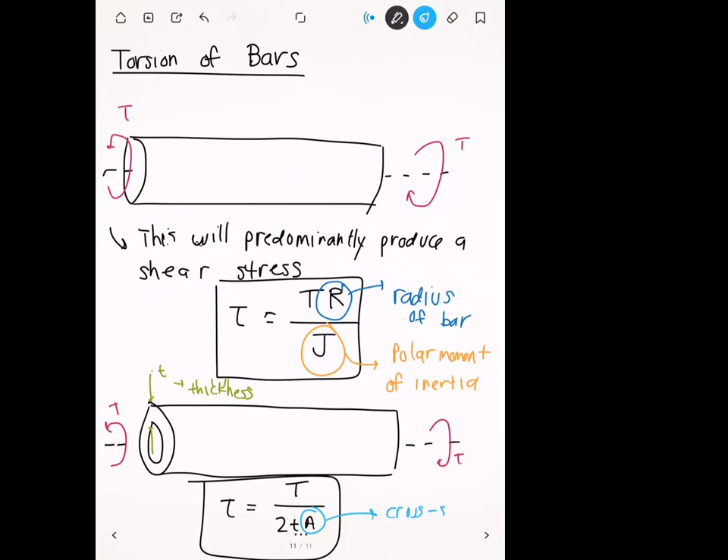If we take these and plug them into, or solve, the equations of elasticity, our solution for the torsional shear stress is big T divided by 2 little t A, where the only new addition here is A, the cross-sectional area.

So these are your solutions here for the shear stresses that occur when something is under torsion. The place I see this most often is in automotive applications—you have a lot of shafts in your engine exposed to a lot of torques, and those torsional loadings produce shear stresses like this. So if you're doing finite elements with an automotive flavor, these equations will be useful for you to check your work.

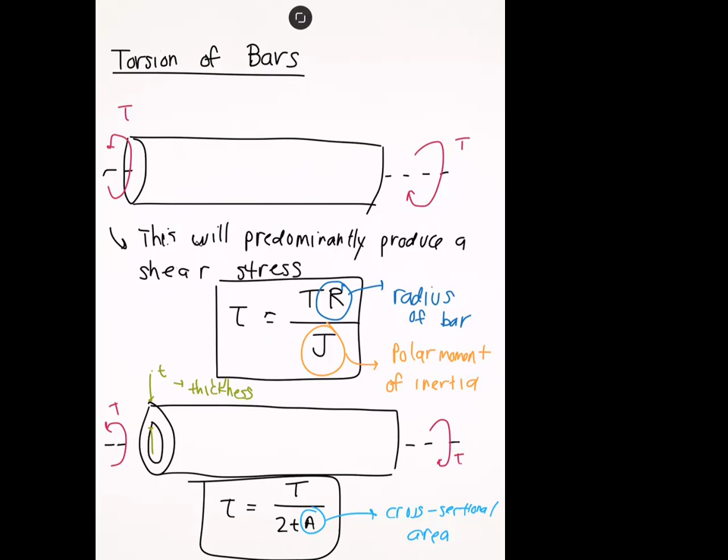Chris. Thank you, Professor, we'll see you Thursday. What's up? I was just saying thanks, we'll see you on Thursday. All right, yep, see you Thursday, Stephen. Thanks, guys.